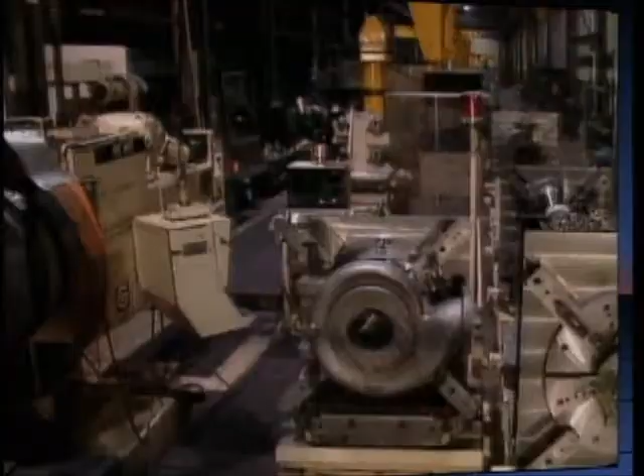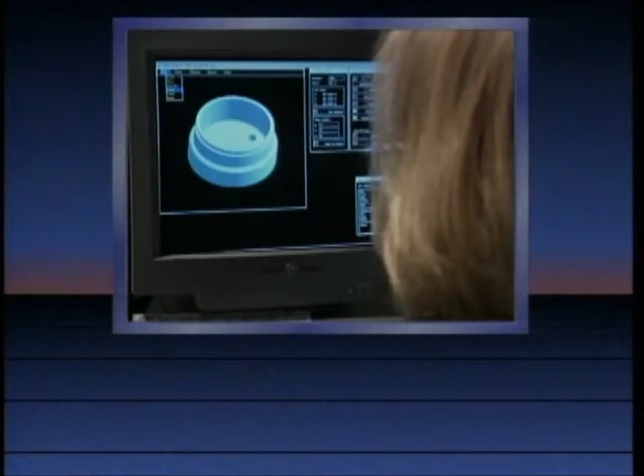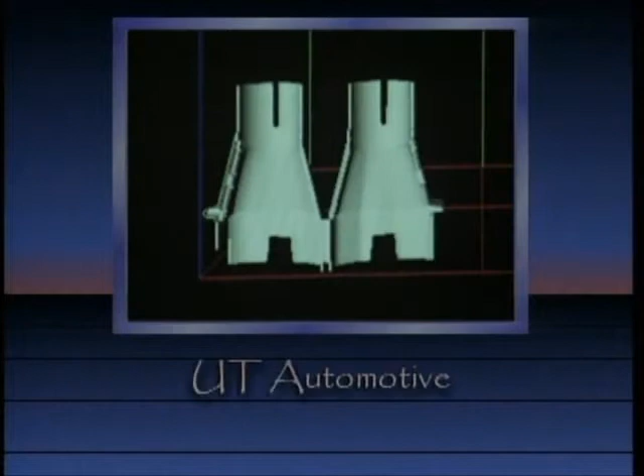This program will review concept modeling machines and their impact on new product development. We will look at 3 different machines and see how engineers are adapting their approach to projects to reap the most benefit. We will see concept modelers in use at Raytheon TI Systems, where design engineers are using concept modelers to save time in new product design. And at Union Special, where concept modeling machines are used for new product development, and as a service bureau offering rapid prototyping to outside companies. Then we'll see how engineers at UT Automotive have brought concept modelers upstream in the design process.

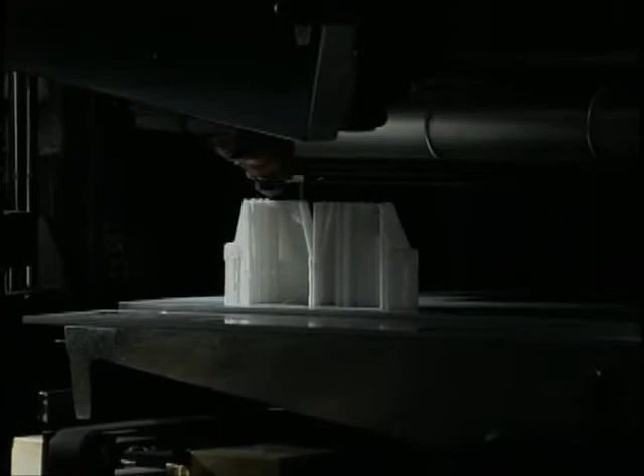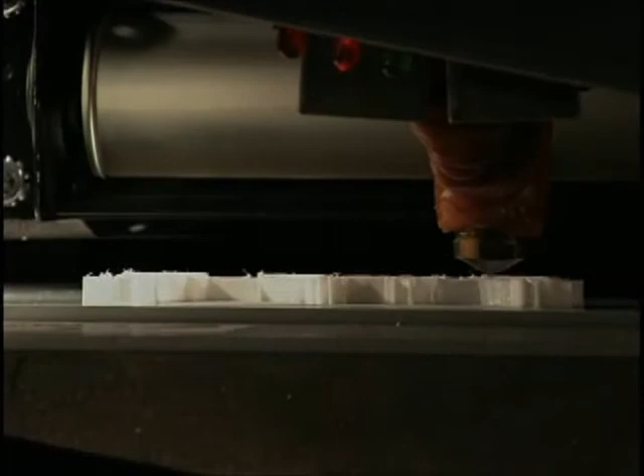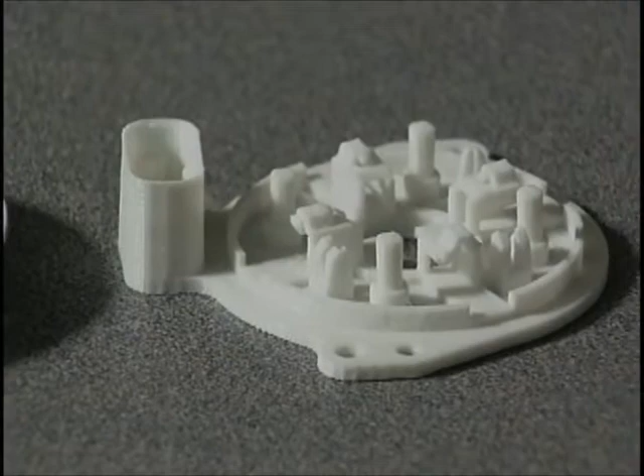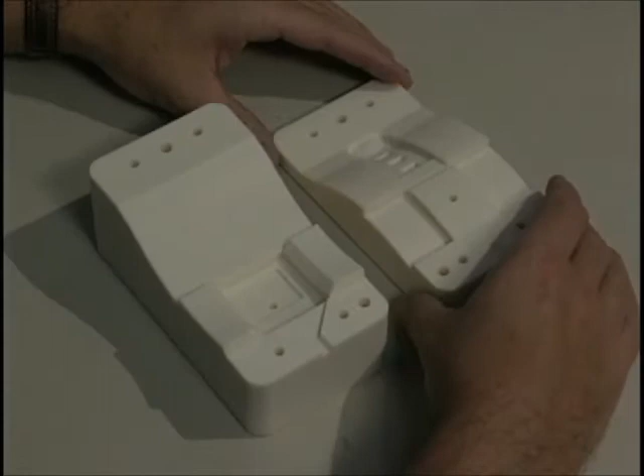Over the last few years, concept modeling machines have evolved into a reliable tool for design engineers. Concept modelers translate geometry generated by CAD Solid modeling software to build a physical prototype. The information directs the machine to deposit building material layer by layer. The real advantage to concept modelers is improved communication. The office-friendly machines can quickly produce inexpensive models. As a tool for design engineers, concept modelers provide a 3D prototype to touch and study. It is a chance to catch manufacturing errors at the design stage and a great visual aid to sell an idea.

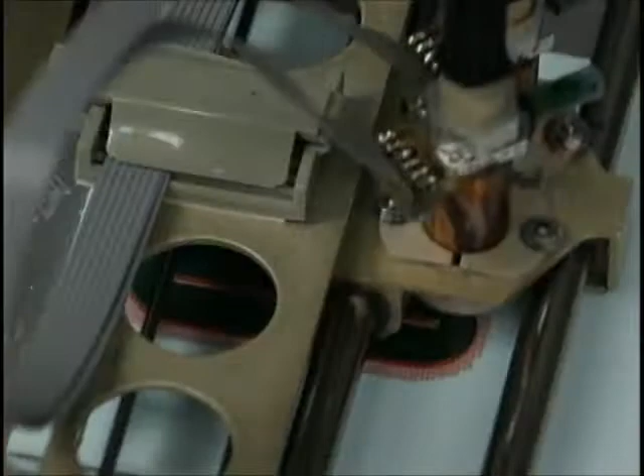One key point of concept modelers is that they are quick. Depending on the size of the part and the type of concept modeler, a prototype will be created in a few hours or a few days. Another plus for concept modelers is that they are simple to use. Most often, an operator can complete training in a day. The longest training period required to become familiar with the machine is just 1 week.

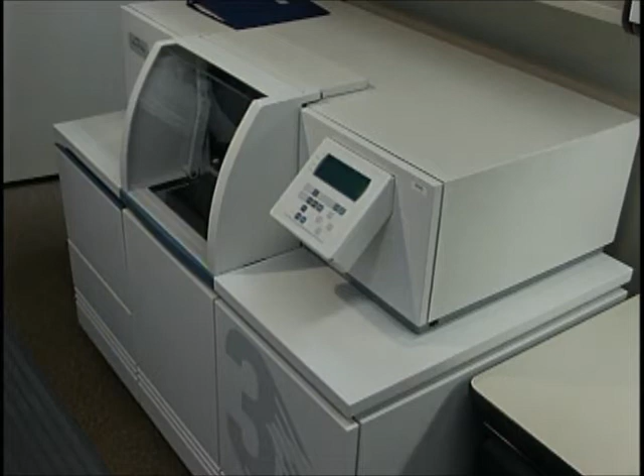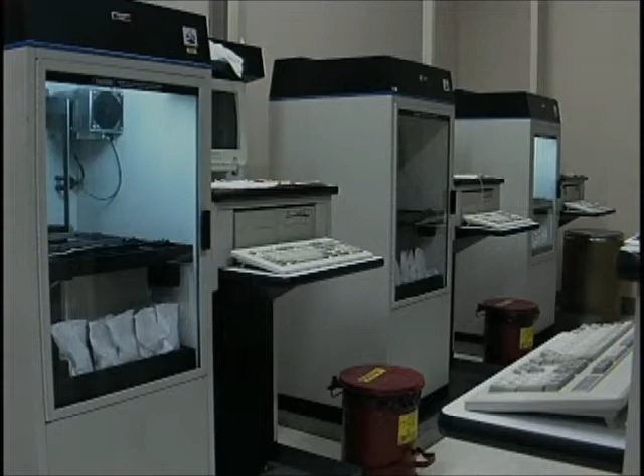Possibly, the biggest plus for concept modelers is the price tag. With prices in the $50,000 to $60,000 range, concept modelers are affordable to a relatively broad market compared to more traditional rapid prototyping machines. It's awfully important to recognize the value of being able to take an electronic model of a real, honest-to-God physical part and produce that physical part in physical reality.

Think of it as kind of like a spell checker. Spell checker, the role they play for word processors. Well, you can think of this thing as, in a sense, being a geometry checker for engineering 3-dimensional pieces. So there's a basic value that the technology's got, period.

So one of the issues there, I think, is that the places where it has been used today, it has clearly delivered within that little activity tremendous benefit. Shortened lead times, better designs. All of the things that we're looking for have come out of it, and I don't think anybody argues that. But when you stand back and you look at those little areas in the context of the big system that they're in, that doesn't contribute to the bottom line of the system. And I think that's one of the big problems, is that it really needs to find its way into every activity involved in doing a fairly complex system.

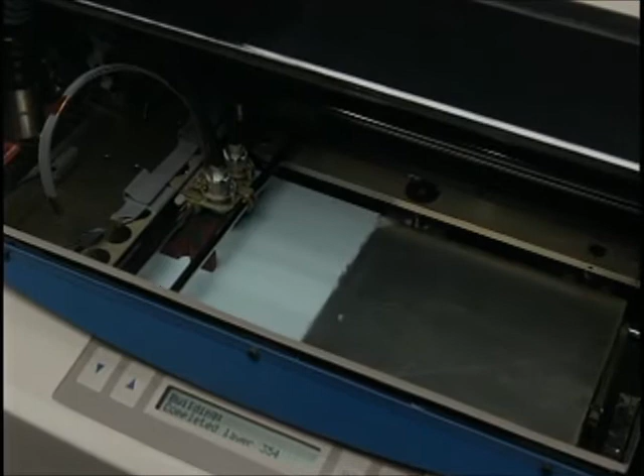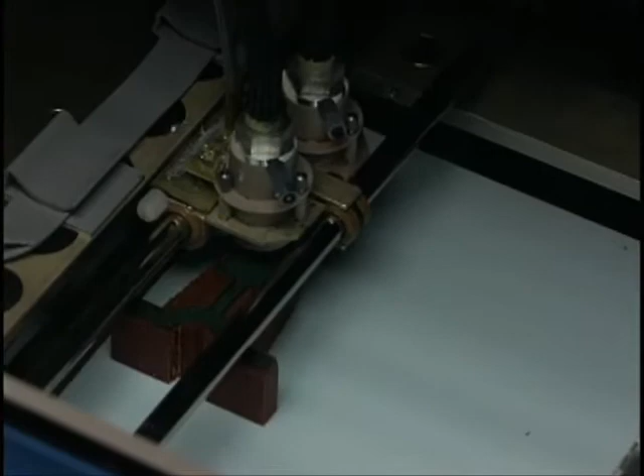So I think it's a big step forward. It gets us, in general, beginning to think in 3 dimensions instead of 2 dimensions, and gets that thinking happening in the engineering office as well as in the lab or wherever the other machines are. And it just begins to spread that way of thinking and that way of communicating out into the entire community. So I think it's unbelievably valuable.

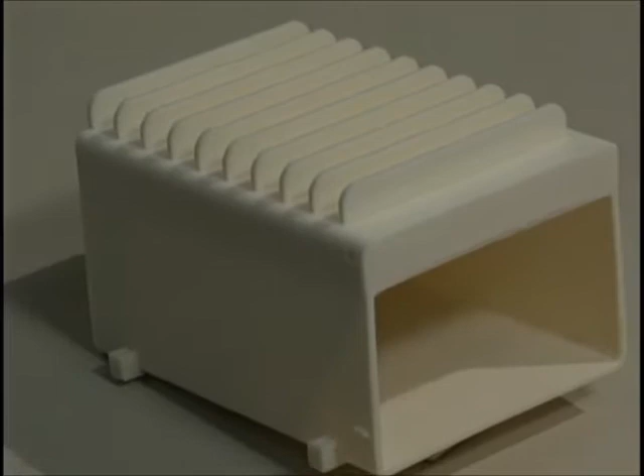Raytheon TI Systems in Lewisville, Texas was an original beta testing site for the Actua 2100 by 3D Systems. Designers working in an engineering environment use the Actua 2100 to make electronic devices for military missiles. The Actua 2100 employs a multi-jet modeling technique. It's similar to inkjet printing, applied in 3 dimensions, with 96 jets on the head, oriented in a linear array. The model builds in successive layers, with each jet applying a specially developed thermopolymer material where needed.

The multiple jet head shuttles back and forth like a line printer on an x-axis, building layer upon layer to form the physical part. As the layers build, the model is distanced from the head on the z-axis. If the part is wider than the print head, then it's repositioned by a cross-axis on the y-axis. The building process continues without interruption until the model is completed. Reception of the Actua 2100 at Raytheon TI has been positive.

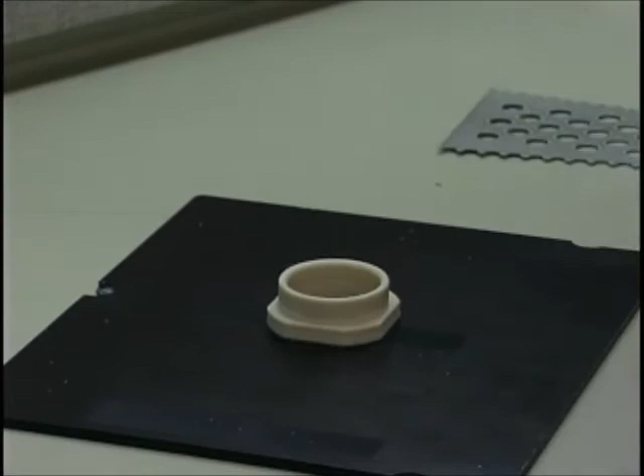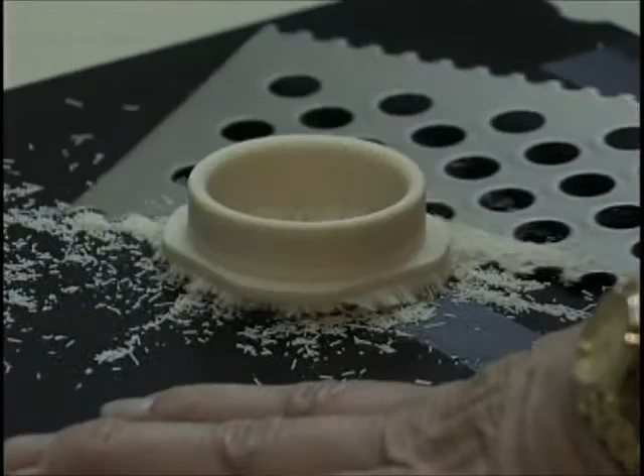We design cast parts, basically of a whole variety. Anything from, I guess, potting molds, which aren't actually cast, but then we'll also design mechanical parts, fixtures, and hardware. The concept modelers offer, I think, even faster speed as well as better access to the engineers for the concept parts for use as models and for display type items where you're in a meeting or whatever and you want people to be able to see what you're actually thinking of and make suggestions about the part. That actually runs a lot faster from the standpoint of the engineer.

Just last week we had a design review for our system, and in order to give a good hands-on idea as to what the new configuration of my system was going to look like, we did quarter scale models, and we broke our system up into 4 piece parts, and we were able to do a section view of our system, and it was incredible.

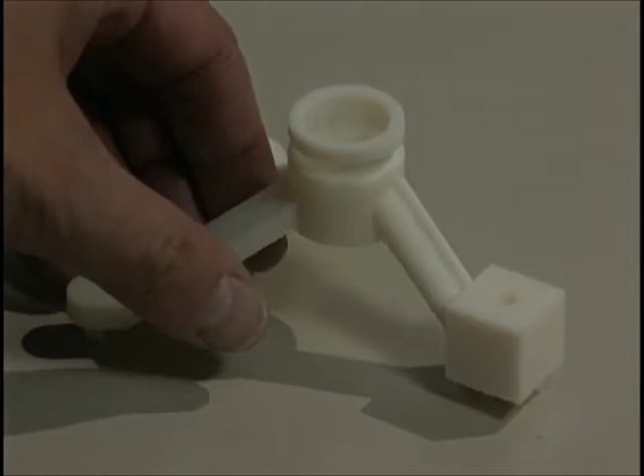We had customers in at the meeting who were able to get a real good look at some of our problem areas, some of the areas of concern that you just can't show in a foil or an overhead. So it provided a very good means of communicating our successes as well as our problem areas. One of the big advantages, when you go into meetings with your boss and try to explain and show pictures of things, nothing helps more than actually bringing a solid part in there and showing it to them, letting them pick it up, feel it, and really know what you're talking about.

Having the machine directly connected and within a few feet of our engineering area has greatly increased our ability to access the machine and use it on an instantaneous basis. We've shortened our design cycle quite a bit with the use of this wax modeler.

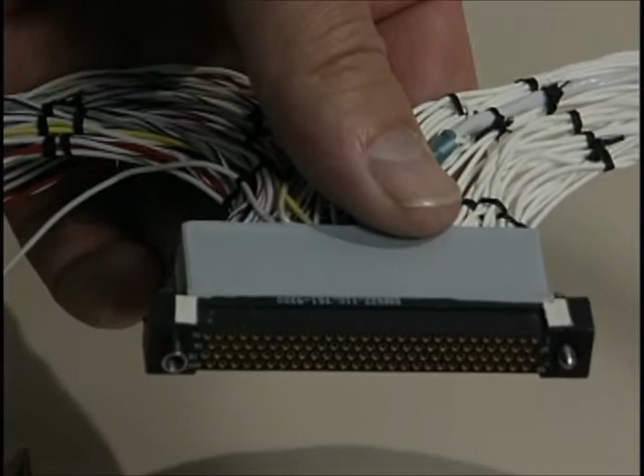We've taken initial concepts from ProEngineer, transferred them directly to the machine, which output models for us. We've done check fits, used them in our design review, and it's taken weeks off our design cycle in that we can more quickly know that our design is sound and that all the interactions between the other parts are sound.

Pretty much in all cases in our area we're using Pro-E for generating the model that we then send to the part. We just generate a standard STL file out of Pro-E and then go into the Allegro, the GUI interface for the modeler, and it's very simple to use.

The engineers really like it. It takes about 4 or 5 steps, and the interface tells you all of what it's doing, asks you to select the item you want to build, select the parameters, and then confirm that's actually what you wanted, and off it goes. There's very little training actually required.

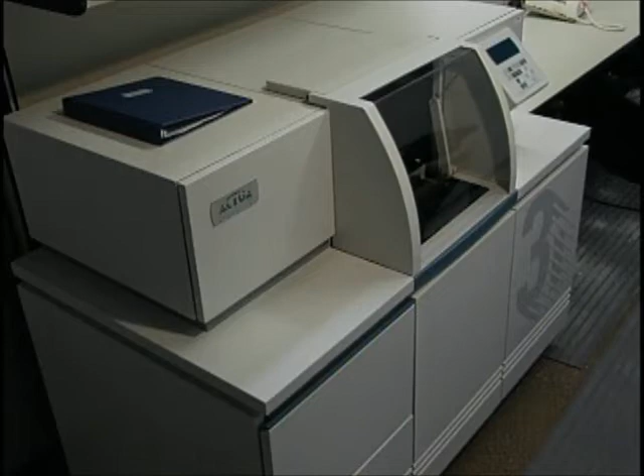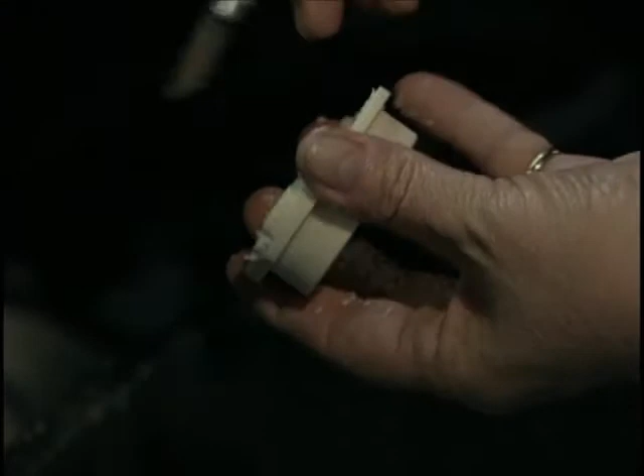The software itself is very simple to use, and then there's a little bit of training on proper operation of the machine, getting the platen and everything in place to get the model ready to run, and then removal of the part and doing the cleanup. Takes a little bit. Mostly it's just showing people where the equipment is to do it.

Although the Actua 2100 has benefited the design cycle at Raytheon TI, engineers have encountered a few bumps in the road. If they could make it just a little bit softer, I think it might be more resilient and not quite as brittle, because it tends to crumble in your hands if you don't handle it right, or during cleanup off the machine you can damage a part very easily trying to remove it from the platform. So you have to be very careful with it.

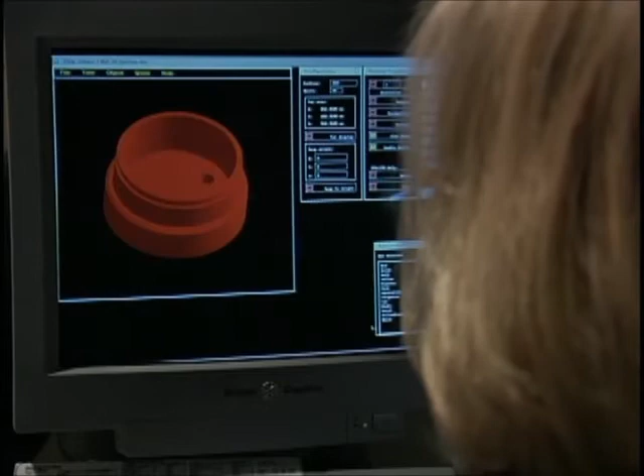The idea of using the Actua 2100 during a project is new and requires a change of mindset. Once they've used the modeler for parts they've actually designed, I think they really like what they see, as well as the speed with which they get parts they can actually handle. Just getting them to use it once or twice and past the training stage so they understand the machine is probably the biggest thing to getting engineers to use the parts.

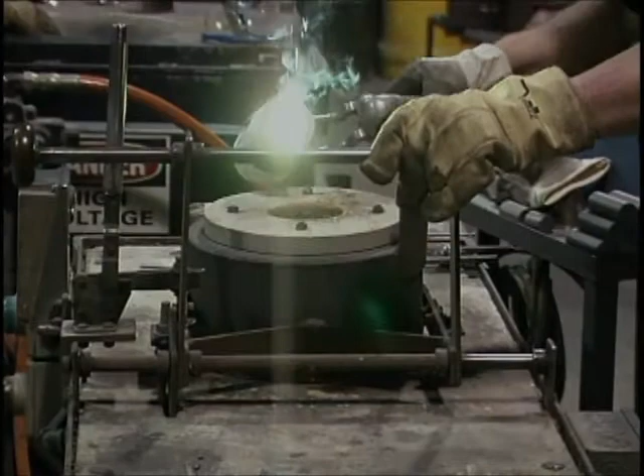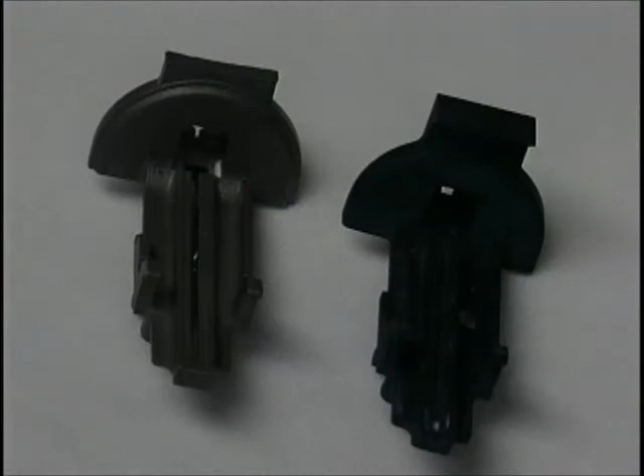At Union Special Corporation in Huntley, Illinois, the original plan was to use the Sanders prototype model maker for in-house investment casting and product development. Very soon, however, outside clients became interested in working directly with the Model Maker Pro, and Union Special took on the additional role of service bureau.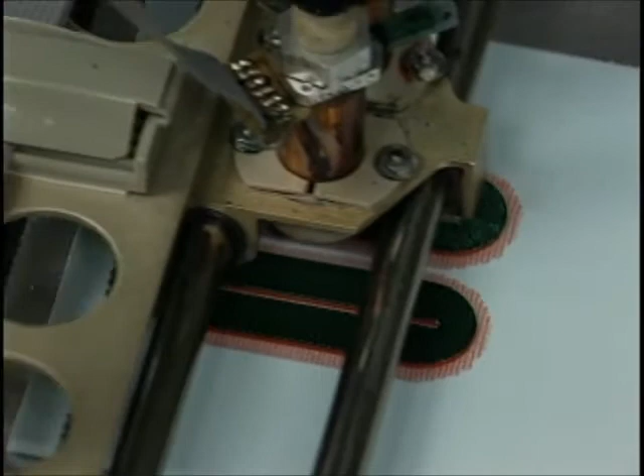The Sanders Model Maker uses two movable inkjet printheads to complete the building process. During the build cycle, one head deposits thermoplastic build material while the other delivers supporting wax material. Both materials leave the inkjets as hot liquid and solidify upon impact with the cooler build surface. The inkjet heads digitally deposit the build and support material as a sphere, which spreads out on impact to a thickness of 2.5 thousandths of an inch.

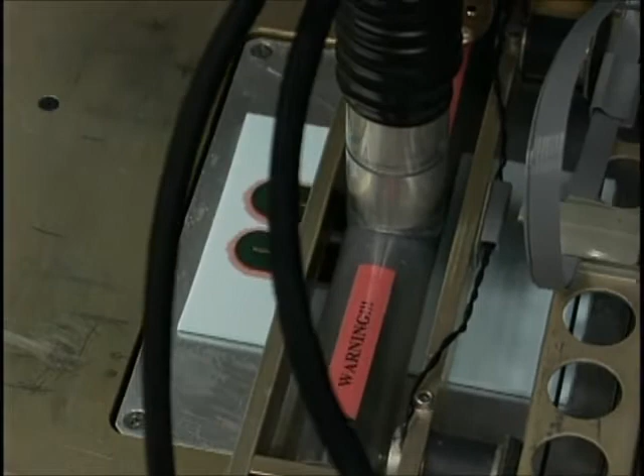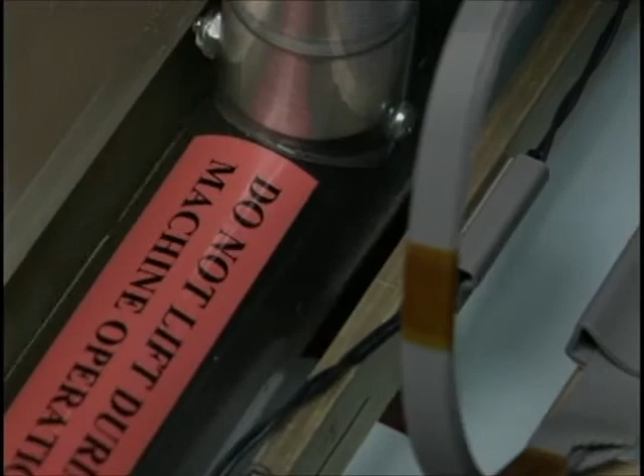This selective deposition process permits traces to be placed next to each other to produce a uniform layer of material. Material deposits along a line at rates up to 12 inches per second. Each new layer is established by a horizontal milling tool that machines a smooth and level surface on the model substrate material. This milling operation allows the model maker to build layers as thin as 0.5 thousandths of an inch, reducing stair-stepping on the surface of the model to extremely small amounts.

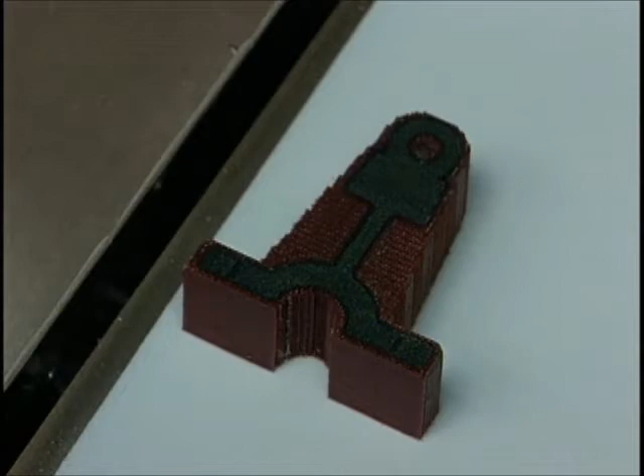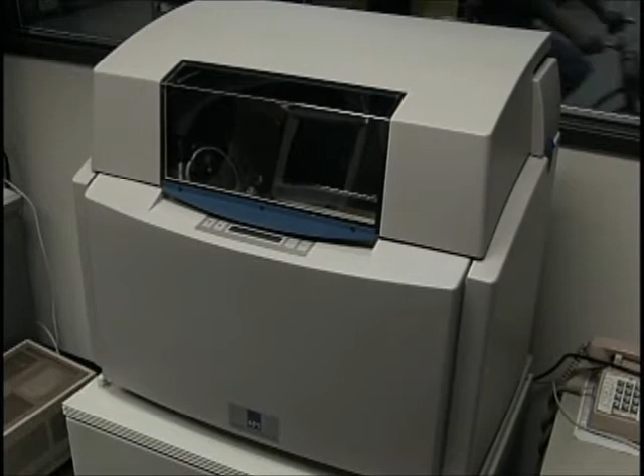Once the model is complete, the support structure dissolves off in a controlled temperature bath. The new Sanders 3D model maker has been redesigned, and one result is the machine noise level is now comparable to other concept modeling machines.

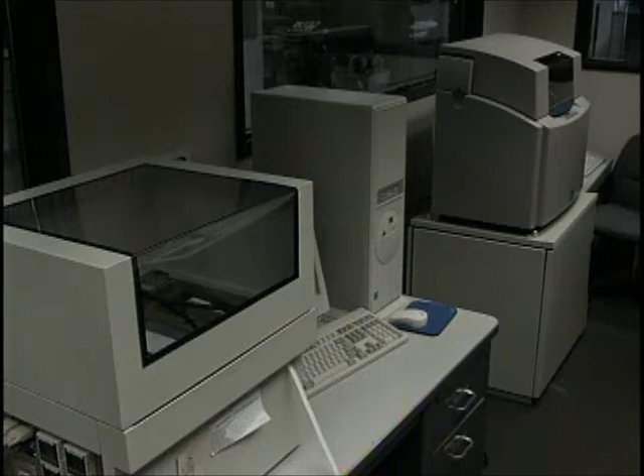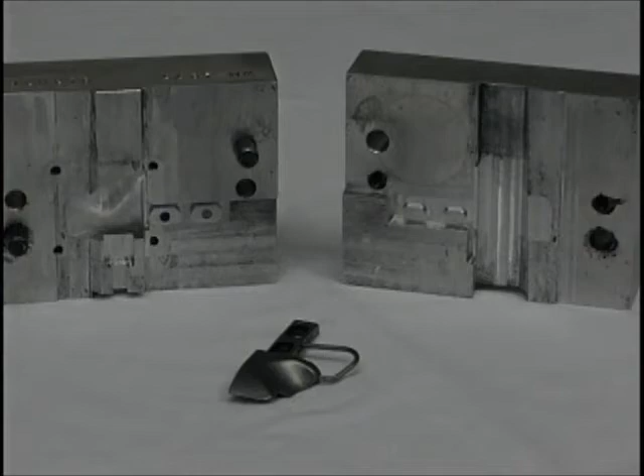Because of its extremely accurate but slow building process, the Sanders machine is not always considered a concept modeler. But for Union Special, the ability of the unit to make extremely accurate wax patterns for investment casting has enabled them to make close tolerance metal parts in 2 or 3 days.

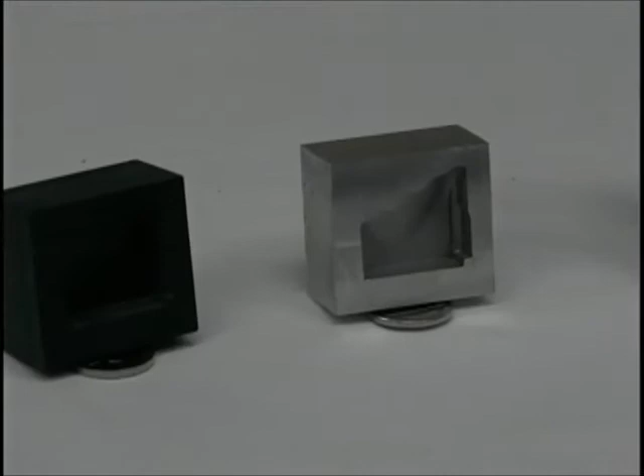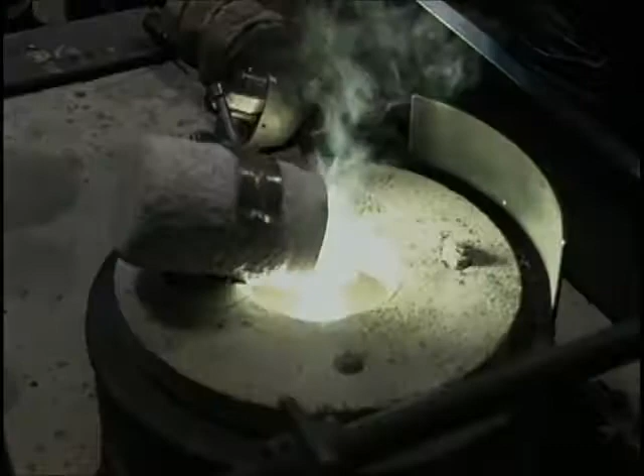We needed a quick way to get to our castings. Any way we could see how the casting was going to work before any production tooling was actually made up. We needed direct castings. And if we got lucky, some tooling as well. We were able to achieve that, and that's a pretty steady thing right now as well. That was a real added bonus along with a lot of other things, but the main thing was getting to investment castings real quick. When you get the requests from our customers, they kind of expect it quickly.

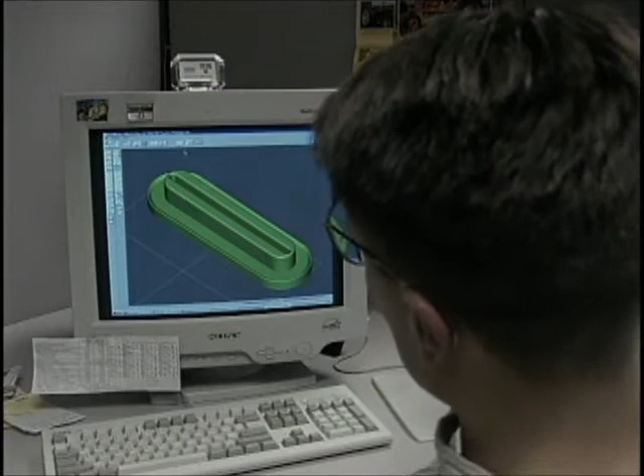If you have to say, I can't give you anything for 8 weeks, maybe a window of opportunity may be gone. Whereas in this process, we can truly say, yeah, well, let me bring a part to you next week and see what we can do. A tremendous advantage. And like I said, other people are interested in this kind of a process too, and if we can offer the services, maybe we can make additional business for Union Special.

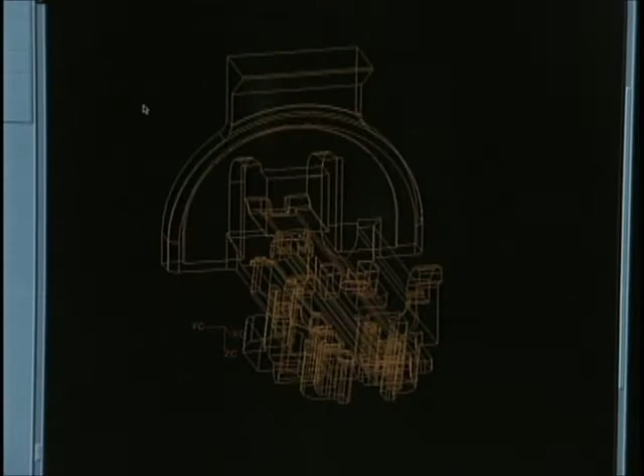Paslode, a manufacturer of power fastening systems, is one of Union Special's Service Bureau customers. We needed a means of prototyping the investment casting tooling, because once you make a severe change to the investment casting mold, the wax mold, you're often looking at a new mold. And for something like this part, this comes off at an angle, and there's side action here, there's top action here. It's a very complicated mold. We might be looking at 50 grand with the coining technology and the machining.

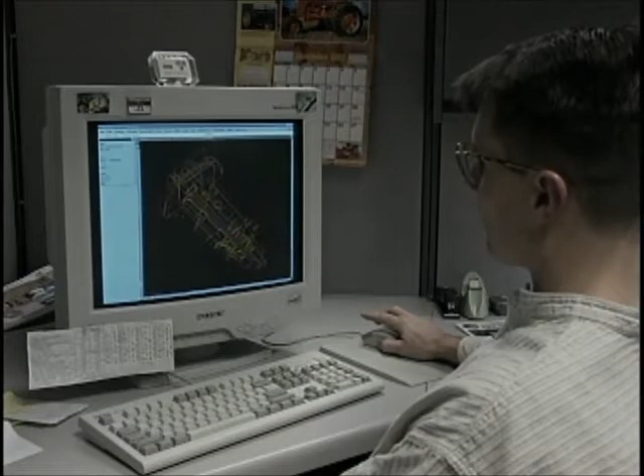In development of this new cordless nailer, Paslode engineers revised the design over 15 times and enjoyed the luxury of testing metal parts without paying for production investment casting tooling. We've made a lot of severe changes to the parts and recast them and recast them. We've done that all without tooling, and that's a time saver, it's a life saver, politically it's wonderful in the company to be able to do that, because when you're ready to go to production, you've got something that you're very confident in.

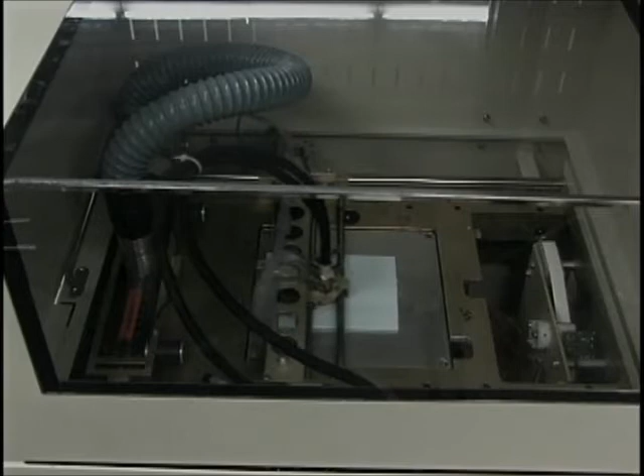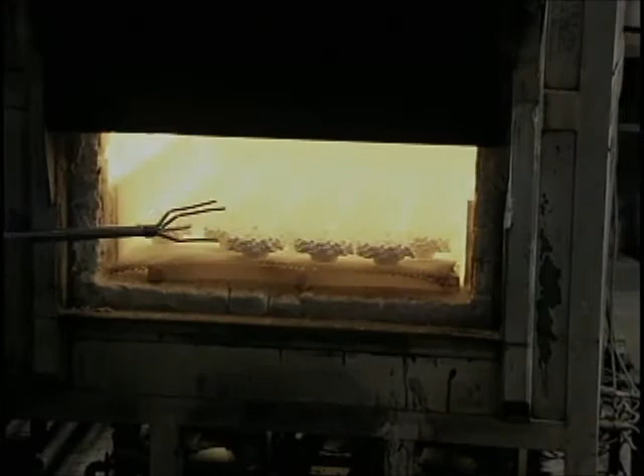Union Special estimates the Sanders models reduce the development process time by as much as a month on some projects. However, that doesn't stop design engineers from suggesting a few improvements to the process. A little bit quicker would be nice, more durable parts, but the one thing we do need to keep is the castability. We never have any problems getting it through the autoclave, it melts out real clean. Our casting guys like it a lot. Those are things we have to keep. Maybe get up to 95% reliability on the machines. Right now I'd say we're about 80, 85, but it's working good.

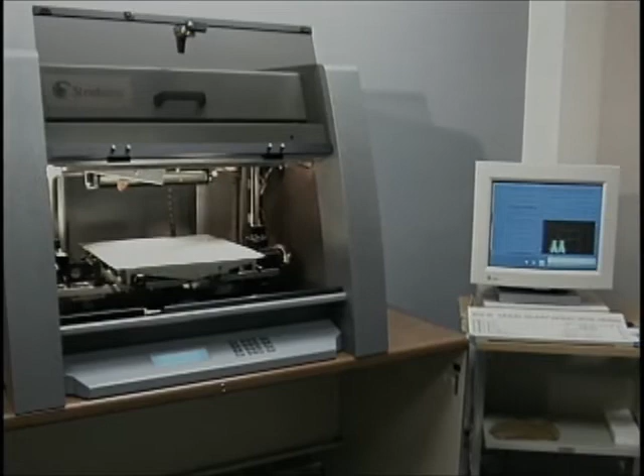When UT Automotive in Dearborn, Michigan began looking into concept modelers, designers wanted a unit that would shorten development time, require minimal training, and would fit right in the office. One of the machines they use is the Genesis from Stratasys. It fits right on a desktop. It doesn't take any more space than a designer would. The stereolithography and other equipment, you need a special room, and it takes more training to use it.

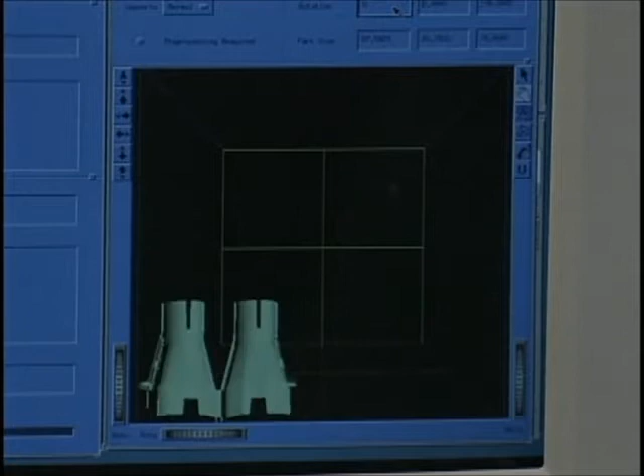This one here, we had very little training. We had maybe a 4-hour session with the people when they set it up to take us through the program, and we've got 4 of our designers capable of doing it, and as new people come on board, we're able to train it in-house without going outside for training.

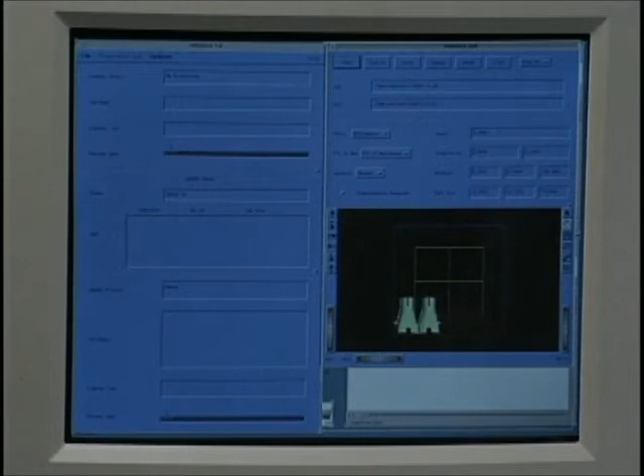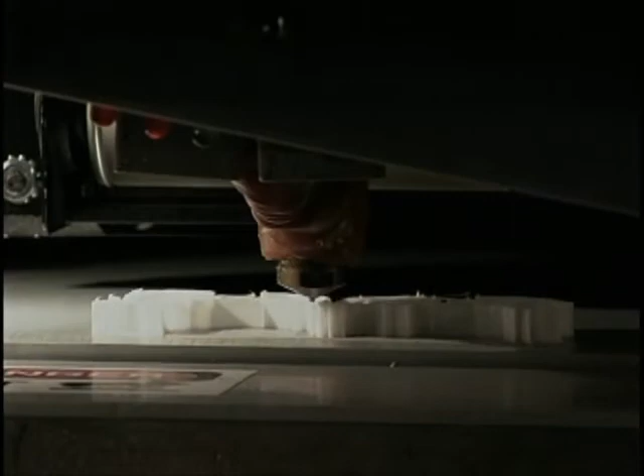Genesis is a 3D printer that allows a designer to print concept iterations directly from a workstation. AutoGen software orients and scales the part, slices the data, and automatically builds parts with a simple point-and-click command. The Genesis produces prototype models up to 8 by 8 by 8 inches in a durable polyester material. A cassette system that holds 50 wafers feeds material through an extrusion head, which deposits a 13 thousandths of an inch width stream of material at a rate of 4 inches per second. Genesis produces models to within an accuracy of plus or minus 13 thousandths of an inch.

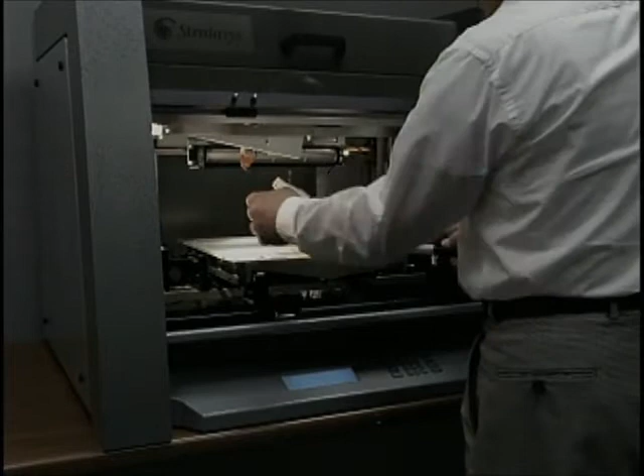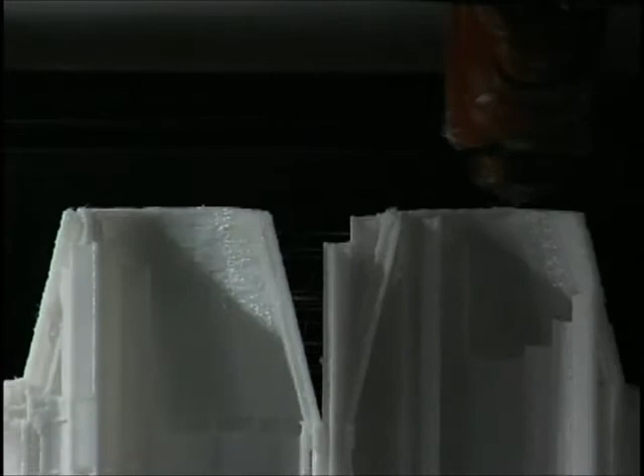At UT Automotive, designers use the Genesis on almost all projects, and the benefits have been substantial. It's actually shortened our development time. Normally, we would do a design, send it out to get another part made, and that process takes about a week or so the old way, whereas we can do it overnight. Set it up before we leave, and when we come in the morning, we have it. Also, it gives our designers a faster chance to come up with different conceptions of parts, different generations. We'll do 2, 3, 4 generations, run the parts overnight, and then sit down in the design review and go through which one is the best for the application.

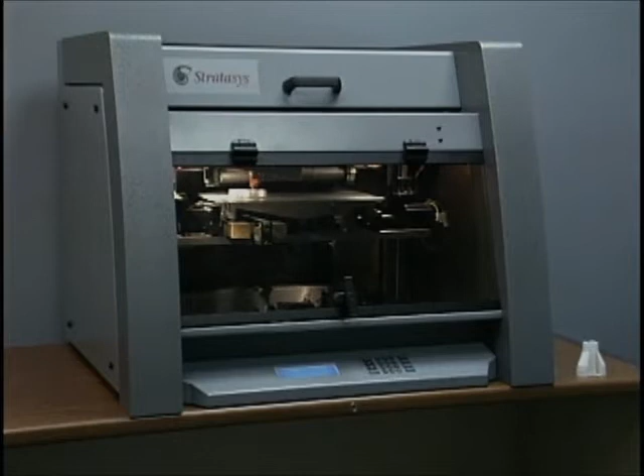We have our Genesis machine seated right in with our design areas. It's no louder than the old pen plotters used to be. Every now and then you'll hear the fan turn on to clear out the heat from within the compartment, but the movement of the slide and everything is just like a regular pen plotter.

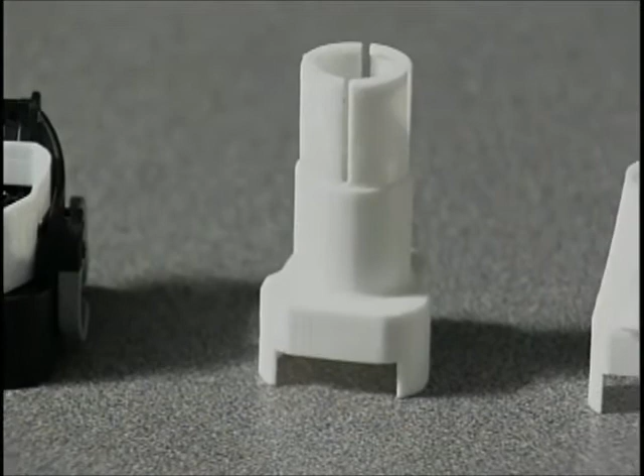This here is one project that we used. I'll show you the different iterations we went through as our designers used it to develop the part. So our designer was able to get a part, took some measurements off of it, and then he started designing in stages. And this ended up going to the customer for a final review, which was acceptable. And then from there, we went to the tool vendors.

With this model, this helped us not only in developing the part, but helped the tool vendor in developing his tool, because he found areas that the designer missed that caused tool locks, that if the tool would have been built, we probably would have had to scrap or had a longer time to build the tool instead of catching it all up front in these concept models.

It's kind of hard to say how much we actually saved in cost. Some projects we've had where they've gone through and we've had no scrap tooling or anything because of the nature of the project. All I do know is the time it took us to go from conception to kickoff tooling, I would say we saved about 4 weeks.

The popularity of concept modelers continues to build, with more being sold each year. In 1997, the Z Corporation from Somerville, Massachusetts, introduced a completely new concept modeling machine. The Z402 uses the Massachusetts Institute of Technology's three-dimensional printing technology. 3D printing uses a printhead to selectively spray drops of binder onto layers of a starch-based powder.

Once built, the part is lifted out of the surrounding powder and cleaned off. To strengthen the part for handling, the operator will then dip it in a bath of wax or epoxy. The part can be polished to a smooth surface for a more finished look. With the arrival of concept modelers, a prototype can be introduced sooner into the development process, and that will change how engineers approach a project in the future.

There's a fundamental change in the way that the engineering goes forward. Okay, that's one issue, and people don't like to change. The second issue is that in order to really get maximum benefit out of this kind of new way of thinking, it needs to be applied across the board in all of the components for the product you're trying to manufacture. It doesn't do you any good to produce a Framus in only 5% of the time it used to take if all the other widgets are still taking the same time they always took. There isn't any bottom line benefit to that.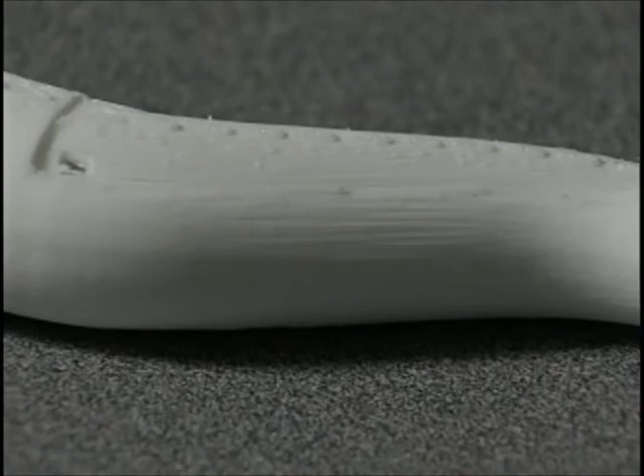So I don't think engineers, once they're exposed to it and once they see what it can do, are reluctant to use it. I do think that management and companies don't quite understand how it's going to change the way they do business, how they will benefit from it. And as a result, there's a reluctance there to spend money on what may be just another technological toy.

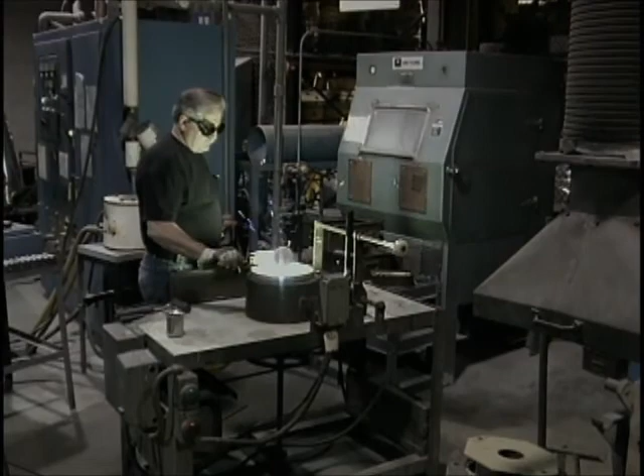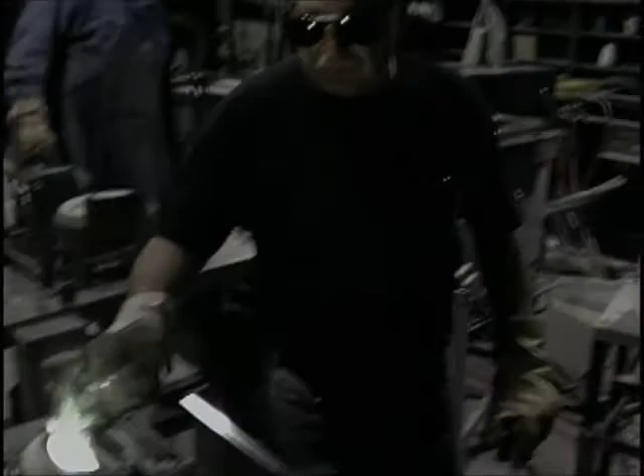What effect is that going to have on the engineering process? Well, I think in one instance, if you're thinking about high volume manufacturing, it now is almost for free that you can, along with when you're designing things, start worrying about what's it going to take down here to manufacture this thing in high volume.

In a sense, you can extend that to things like service. You can start bringing service guys in and say, look, here's what it's going to look like. Can you get at it? What's it going to cost? How difficult is it going to be to go after the oil filter? Here's where it's going to be. I mean, all of that stuff I think gets facilitated big time by having concept modelers and then the downstream stuff. And what's required now is that the process accommodate that and begin to take advantage of it.

And I don't think it's doing it as a whole. It's happening now in isolated cases where, in fact, engineers have this technology. But those are one-offs. It has not been elevated and institutionalized into a new process. And that's what's going to happen next.

With a prototype so quickly available, engineers are free to explore more design options. Having a production prototype in hand for review meetings, design engineers can begin to build stronger lines of communication with manufacturing engineers and the rest of the company.

When an inexpensive three-dimensional model of a part is created at the beginning of product development, the result will have a ripple effect on the entire design and manufacturing process. If your organization uses a concept modeler, be prepared for a reduction of your product development cycle, powered by a clearer understanding of early design geometry and the luxury to take risks.